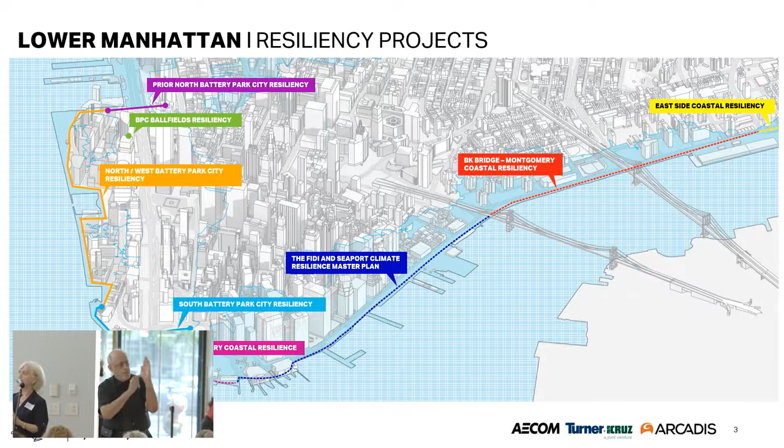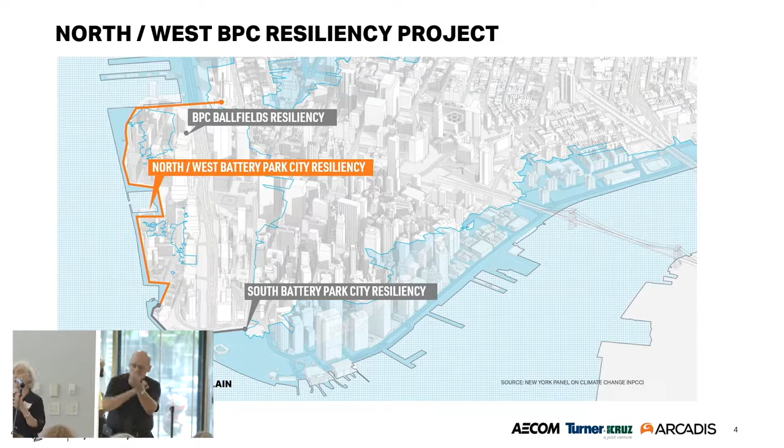If we go to the next slide, we'll get a closer view. The South Battery Park City Resiliency Project extends from the Museum of Jewish Heritage, First Place, through Wagner Park, Pier Plaza, and the northern edge of the Battery. Then in the little dot at the top, you'll see the Battery Park City Ball Fields Resiliency Project. That was a very specific asset-driven project, because that was where Battery Park City suffered significant damage during Superstorm Sandy, lost the ball fields, and saw significant damage to the community center adjacent to them. That project, we're happy to say, was completed almost a year ago now.

The project we're talking about tonight is the Northwest Battery Park City Resiliency Project, which begins in Tribeca. If you look at the left side of the screen here—I'm pointing at it, you are watching this one, but that's okay—it starts in Tribeca and then extends along the waterside edge of Battery Park City southward until it connects with the South Battery Park City Resiliency Project at First Place.

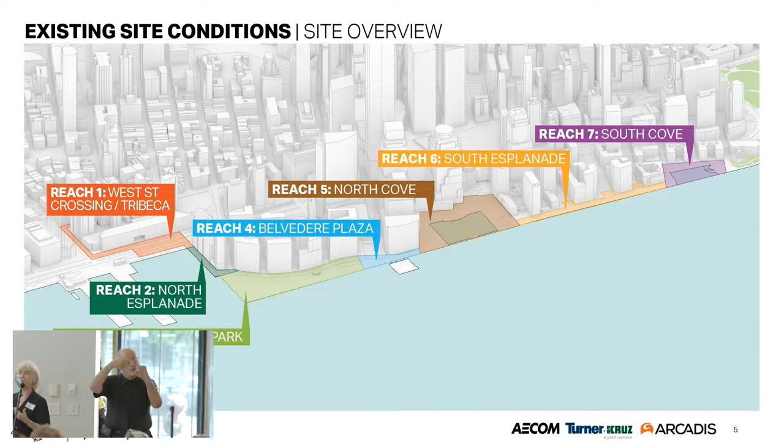Now you may wonder why we are going outside of Battery Park City boundaries into Tribeca. That will be explained in a little more detail as we go forward. But we have to connect high points to high points in order to make sure that we don't have a situation where the water simply goes around our flood barrier system and comes in the back door, so to speak.

I want to point out, for those of you involved with this project in its inception, that this project was at one time two separate projects: a North Battery Park City project and a West Battery Park City project. We had begun design work for the North Battery Park City Resiliency Project with AECOM as our design engineer, and had started to commence the project for the West. But in the spring of 2020, we received design build authority from the state legislature, which gave us a different way to pursue these projects. As a result, the decision was made to combine these two projects into a single Northwest BPC resiliency project. The work done for the North project has been carried forward and is being reflected in the current Northwest resiliency project.

Our project vision is centered on safety, resiliency and environmental stewardship, engagement and collaboration, which we've already talked a lot about, and design excellence. This is a very beautiful neighborhood and we want it to remain a beautiful neighborhood, so design excellence is a huge part of what we're doing.

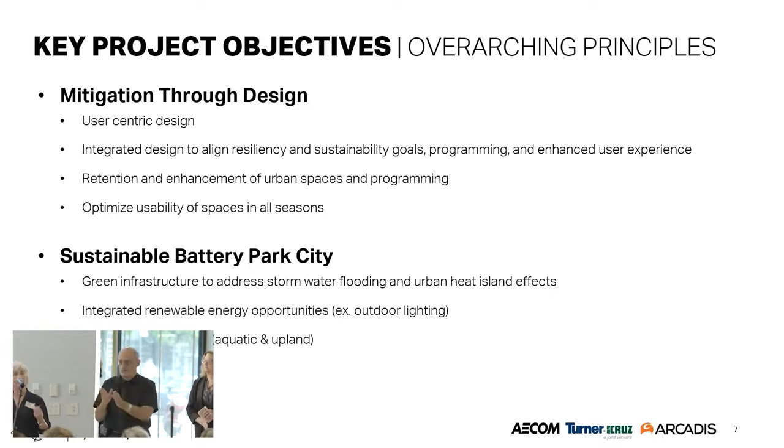We want to make sure that we are incorporating sustainability into our plans. We have a sustainability plan that was launched last year that we're very proud of and take very seriously. We want to make sure that our resiliency projects reflect the principles and tenets of that sustainability plan.

With that, and right before I turn it over to Garrett Avery from AECOM, I just want to take a moment to recognize the folks on my staff who you will get to know much better over the course of this project: Claudia Filomena, our Director of Capital Projects, and Varun Kohli, our Assistant Vice President of Planning and Design, along with others who are not here this evening.

Okay, all right. Claudia and Varun, come on up so people can recognize you and you can wave your hands. Okay, so get to know these folks, you will see a lot of them. Okay, all right, and I am very excited this evening

to be introducing our progressive design build contracting team. The design build approach that we have adopted, which Garrett will explain to you a little bit more, involved the retention of a consulting engineer. We retained AECOM as our consulting engineer, acting as an owner's rep for the authority throughout the project, and they have aided us in procuring a top-notch, world-class team to design and construct this project. We are very, very happy to have Turner Construction, E.E. Cruz, along with their design team, including Arcadis Engineering, Scape, Big, and a few others that Garrett will talk to you about. I'm so very happy and gratified that we're able to provide such a terrific set of experts for this really super important project. Thank you again.

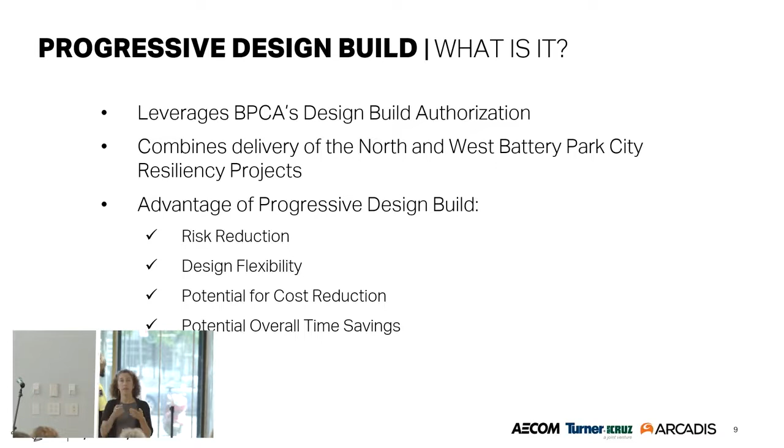It also allows for design flexibility and inline cost efficiency, understanding construction in design rather than designing and then reaching a point where you must redesign or work through challenging aspects at time of construction. It eliminates that concern, and there's hope for overall time savings because of that combination and collaborative environment.

The team is set up essentially as a partnership, through AECOM's role as consulting engineer with the Turner E.E. Cruz team, along with Arcadis, BIG, and Scape. All of you, as well as our project stakeholders, including Community Board 1, Battery Park City's Internal Resiliency Working Group, other building owners, managers, residents, and a fairly extensive list of city, state, and federal agency partners connected to the project.

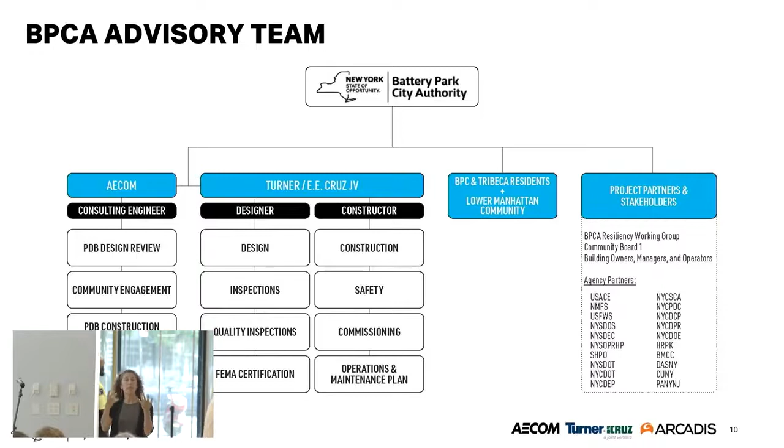BJ mentioned earlier that tonight is the fourth community meeting, but it's actually the seventh time since we got started a year ago that we've been together.

In the very beginning, it was really about collecting information and understanding the technical criteria that were important. We conducted workshops, talking through each particular area, walking with members of the community, trying to gauge a level of concern for a particular item, experience, aesthetic, and then setting the parameters for this team to respond to, which I think they've done quite well.

From there, we put together the procurement process, and through a short list of three folks, asked each to prepare concepts and submit a conceptual design with their best idea and a cost associated. Through that process, which we shared with you in June at our open house, we arrived at this fantastic team.

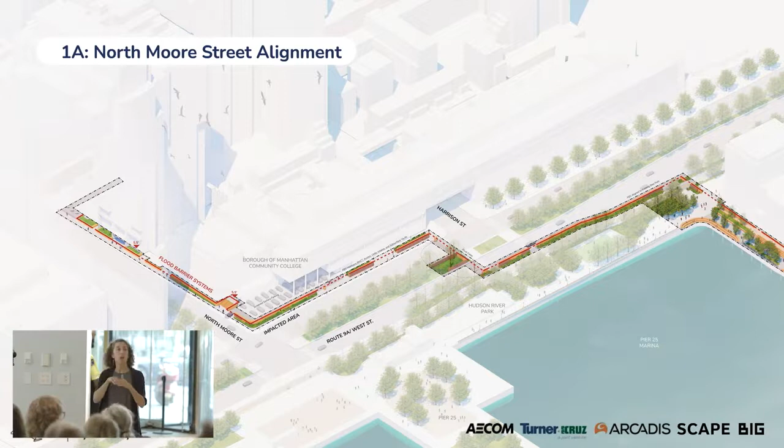So these are significant structures, and they're engineered basically to respond to the flood levels that have been modeled for this area. They also include a fair amount of what we call deployables, so gates, whether they're roller gates or swing gates, to make sure that access is maintained as you're approaching the waterfront. And a lot of the community comments that we heard about this area have very much to do with that waterfront access and the safety of biking.

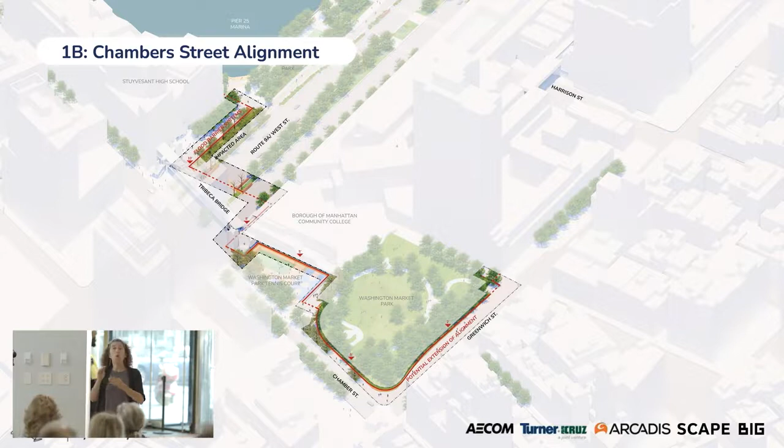For those reasons, we've also looked at another alternative here, which is 1B, the Chambers Street alignment. We've kind of rotated around here, so now we're looking north. What we're looking at here is basically a flood protection system that would move southward from the northern esplanade, running along Route 9A in the median between the bike path and the plaza in front of Stuyvesant High School, crossing over Route 9A with a set of swing gates, and then we're really trying to minimize its presence, integrating with the handball walls in Washington Market, tennis court area. Potentially, this is something that's subject to further modeling - we can either stop the flood protection there to meet our design elevation, or we may need to look at an element that's roughly between 1 and 3 feet along the edge of Washington Market Park.

So that's our first reach. Between them, looking at the advantages and disadvantages, and we can kind of speak about this further at the boards in the back - what we're looking at here in 1A is something that offers a greater area of protection and potentially fewer agency regulatory reviews, but that we believe may come with more urban design impacts in terms of views and access, more deployable elements, and higher operations and maintenance costs as a result.

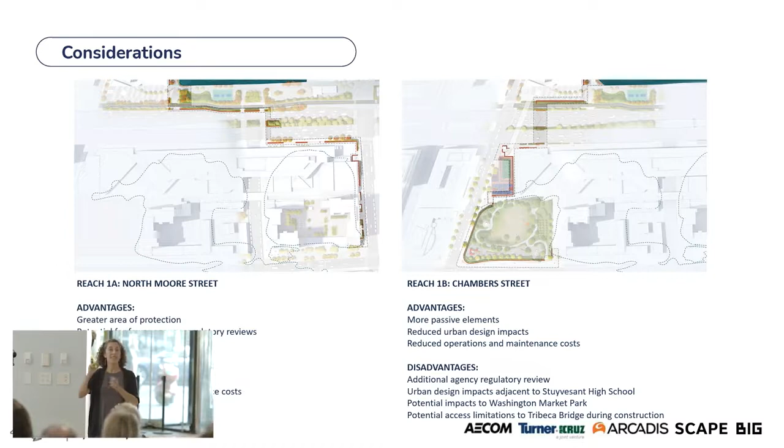In Reach 1B, there are more passive elements, meaning elements that don't need to be operated before a storm comes in, and reduced urban design impacts. However, the amount of area that we're protecting is of course lessened. And there are some additional impacts on Stuyvesant High School, Washington Market Park, and potential limitations to the Tribeca Bridge during its construction.

Reach 2, the Northern Esplanade. This area is maybe a little bit more straightforward, really defined by its acting as a gateway as you're approaching from the north towards the Battery Park City waterfront.

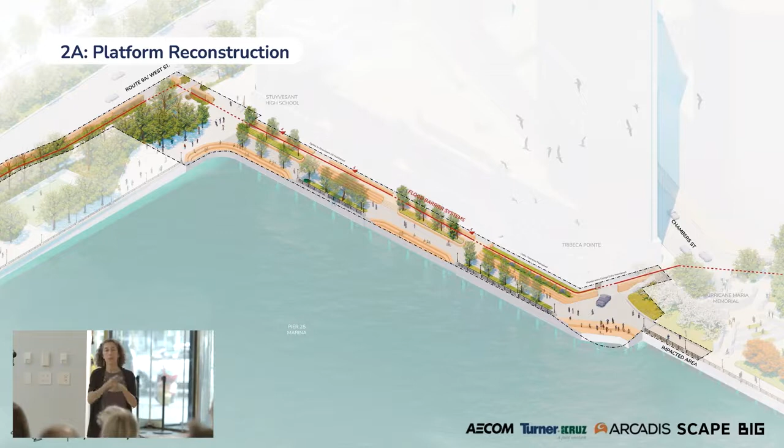Here, to accomplish the flood protection, we need to integrate up against the Stuyvesant High School building, so the entire platform here essentially needs to be reconstructed. In this alternative 2A, we're keeping basically the same cross-section that the platform has today, meaning the east-west movement and the area for trees on either side is maintained in its current dimension.

Because this is such an important corridor for movement, and because engagement with the water has really been expressed as a desire in some of the community engagement feedback, we've also been looking at an option here that would extend further out into the water.

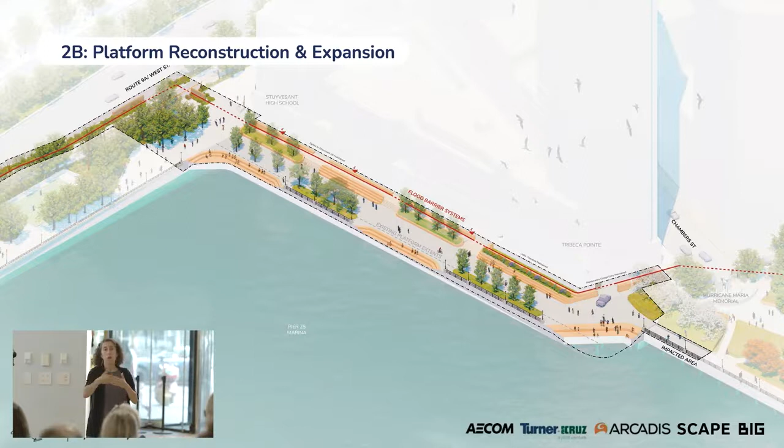It would have some shadowing impacts, which means there'd be additional regulatory review with agencies such as those that govern the water. However, there are some benefits here in terms of the amount of space for movement, for planting, tree canopy, etc. So it's kind of a classic trade-off between urban design result, but also permitting schedule and some other aspects.

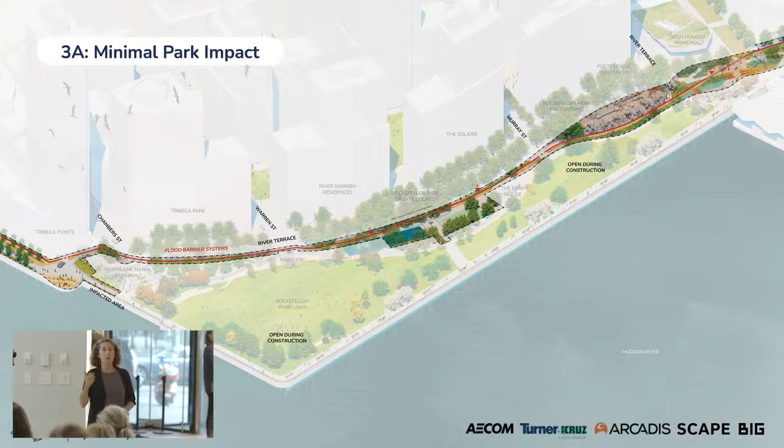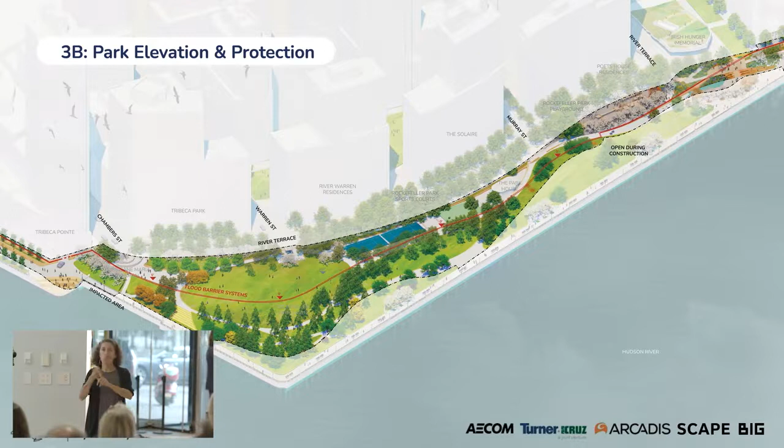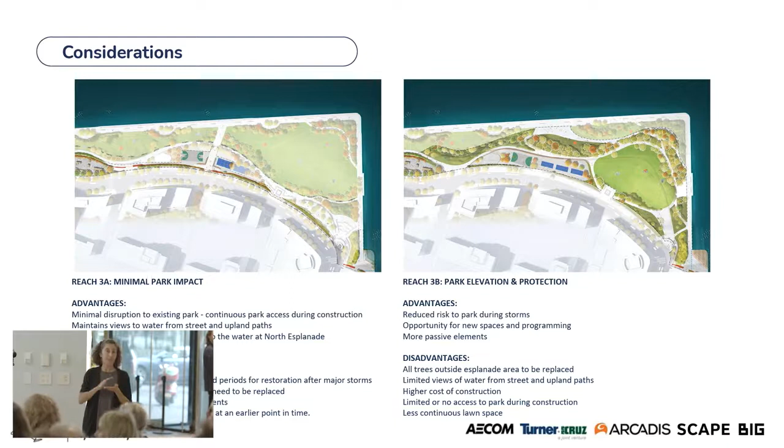This slide sums up the considerations. Reach 3, Alternative A: a more minimal park impact, with also potential opportunities for get-downs. And Reach 3B: reduced risk to the park during storms. I'll just highlight that the disadvantage in 3A is that sometime in the future, the park may be out of service for extended periods.

Okay, let's go to the next slide. So now I'm going to talk a little bit about Reach 4.

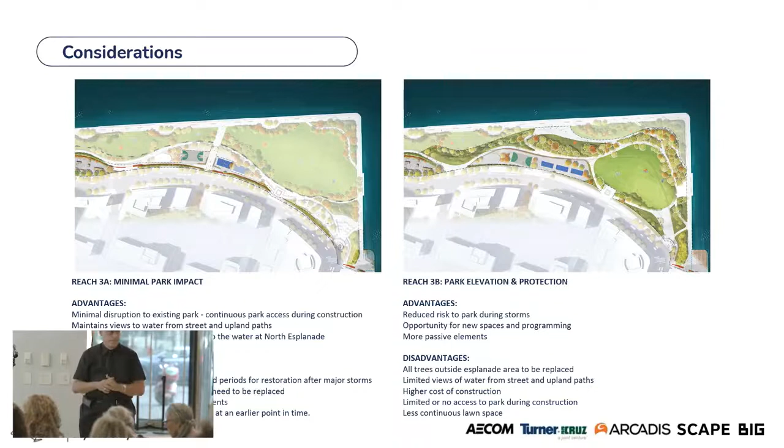The next reach, Reach 4, is called Belvedere Plaza. Basically we have essentially the same flood alignment in both A and B. It is a more passive flood barrier system, and it incorporates the flood alignment into a new elevated plaza and accessible planted berm.

The two options, A and B, only differ relative to the positioning of the ferry terminal. I want to emphasize this is a Port Authority element, so it's very important for you all to make your comments heard in this broader context.

For option A, the idea is to potentially relocate the ferry platform. What this does is enable views of the Statue of Liberty from the Irish Hunger Memorial, which was the design intent of that element.

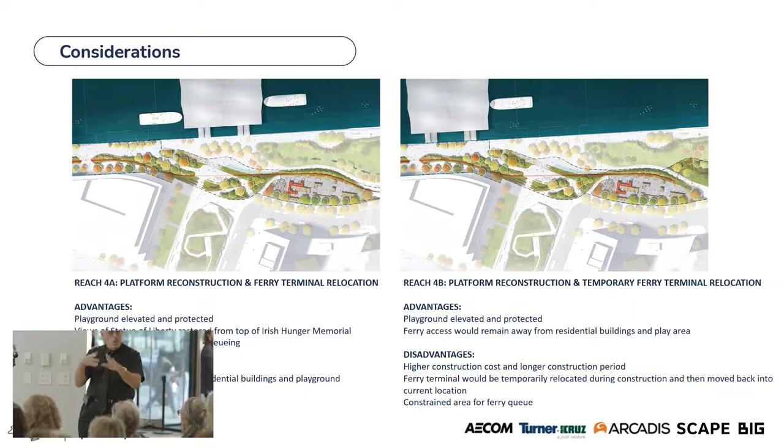It also creates more space for ferry access and queuing near the ferry terminal. The disadvantage is that it moves the ferry terminal closer to the residential buildings and the playground, and we've heard community comments about emissions and noise from the ferry terminals. Reach 4B would potentially move the terminal temporarily during construction but move it back into its current location. It has a more constrained area for a ferry waiting zone, and it would potentially have a higher construction cost and a longer construction period.

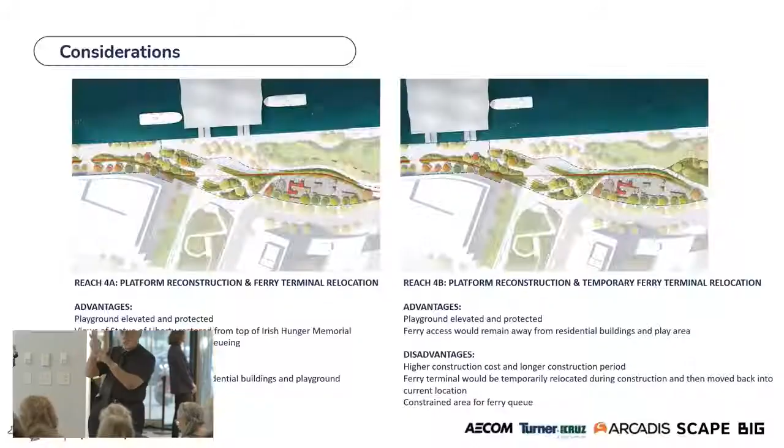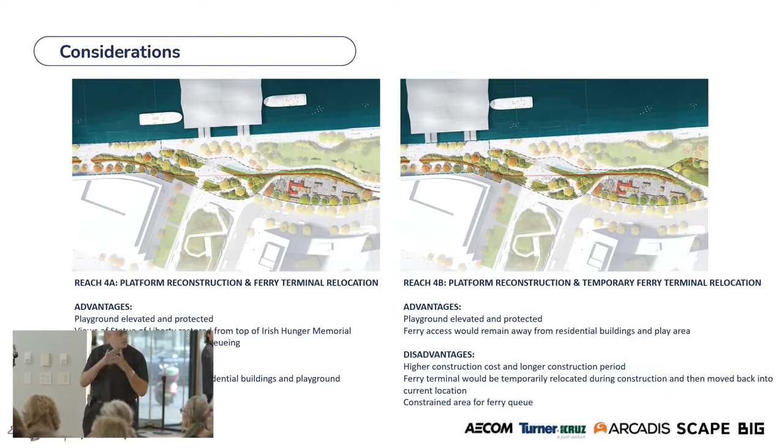I'll just sit on this slide for a minute. In both cases—okay, I don't have a pointer, but maybe Garrett, you could point towards the Irish Hunger Memorial. Let's go back to a plan that has the labels.

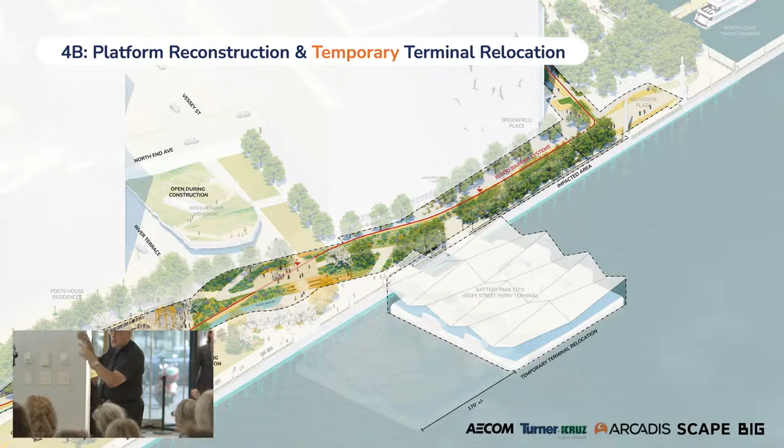So you have the Irish Hunger Memorial in the center of this image, and this is the relocated, temporarily relocated Battery Park City Vesey Street Ferry Terminal, here. It's only about 170 feet, so quite minimal, but the impacts are felt in different ways. You can see the Irish Hunger Memorial, North End Avenue, Vesey Street, and Brookfield Place.

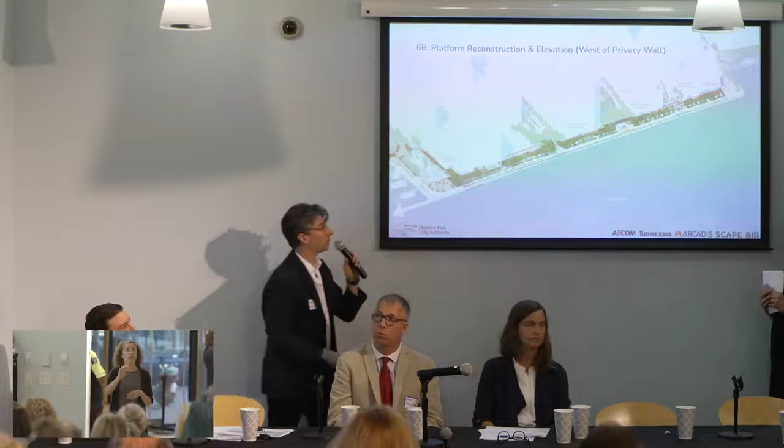As Peter was saying, we do have leanings in some cases, and in this case we're going to be strongly looking at alternative 6A. In the case that we do have to reconstruct the entirety of the platform, we're carrying that as an alternative, and we're representing it to you here.

The impacts, of course, would be that the entirety of the platform and everything on it would be reconstructed. It would be elevated to a higher elevation, just to get that added benefit for sea level rise in the future. We do see an added benefit that we could rethink the edge and perhaps get more engagement with the water. But as I said, we're really looking here at trying to accomplish 6A, because we know how important impacts to the existing trees are, and we'd also like to be doing this as sustainably as we can — meaning using what we have as much as possible.

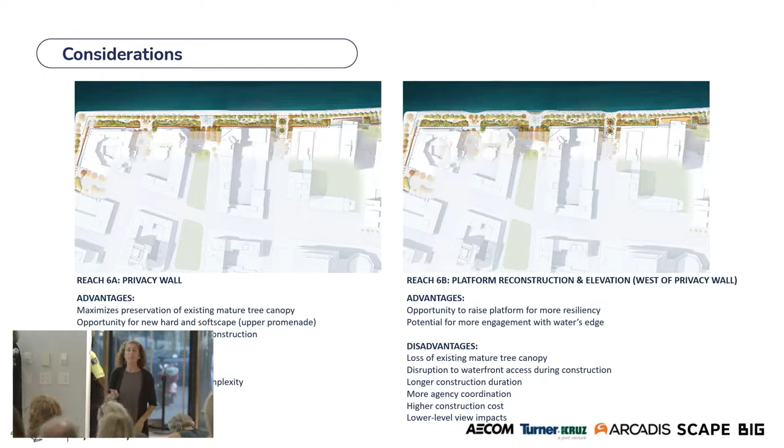It's roughly 8 feet from existing ground level today — that's about how high the flood protection needs to be. So it'll be pretty similar.

That's a really tricky thing about running flood protection through this stretch. You have a platform that's basically over water — if you were to look underneath this thing, you'd see water all the way up to the red line. There's water underneath that entire area, so really the buildings start at the water's edge. The only way to do flood protection is on dry land, and we can't fill into the water. So this area is the area we have to work with.

We're working with a great contractor who will be looking at everything they can do to make it as quick and as painless as possible. I can't speak to the details of that right now, but it's certainly top of mind. Also, things like privacy and screening — we'll want to speak with all the tenants along those ground floors to see what's important to them.

Yeah, so the South Battery Park City project is a separate process. Some of us are not involved in that, some are. I would turn that question to those either now or at the boards. I can't speak to the details of that one.

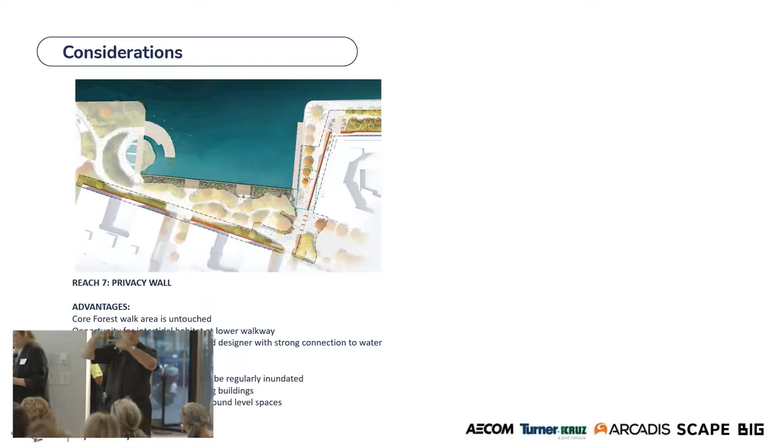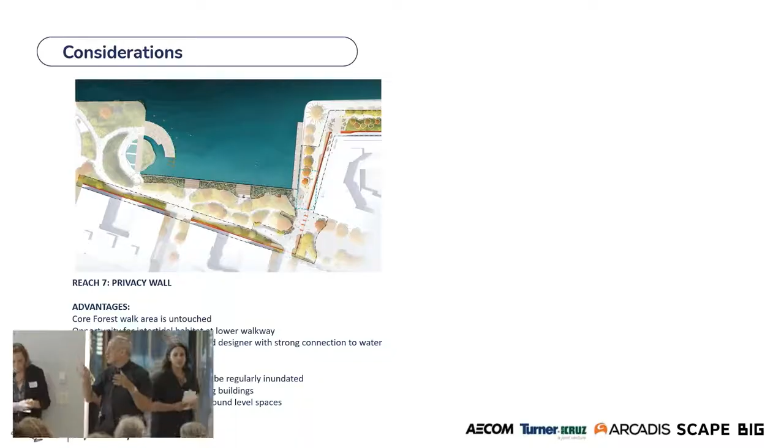In the next slide, we have a summary of the considerations, and we have some sub options because the community comments were so passionate about preserving this landscape. We have sub options relative to the lower walkway, here. The thought is that over time, there may be an opportunity to introduce intertidal plantings, increased public interaction with the water's edge, and to really extend the artist intent of Mary Miss, who we are in very close contact with, into this public realm design in the future.

Again, we're discussing the alignment location here, which is the red line towards the back of the screen, with deployables and the line of protection roughly along the edge of the building. So that's essentially a high level summary of our approach to reach 7.

The disadvantages are that with sea level rise, these lower areas will be regularly inundated, but in some cases, especially if we design some of these lower zones for intertidal habitat, that could also be transformed into a habitat advantage, depending on if you're a fish or a person. If you're a fish, it's very positive. I'll stop there, and pass it back to Peter for some remarks.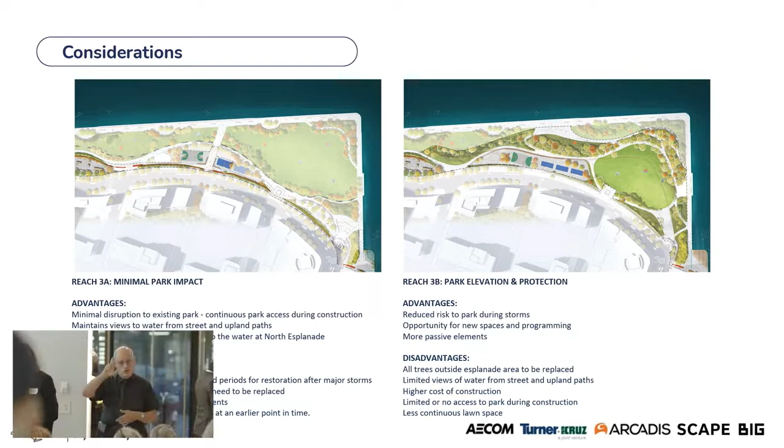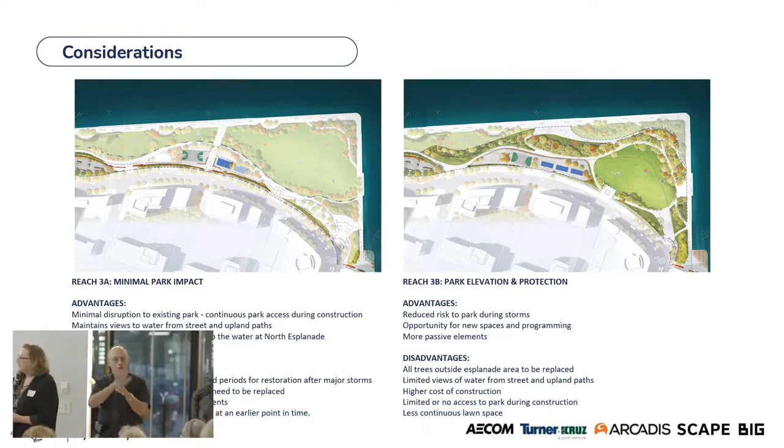Can we go to 4, please? So Belvedere. Here's 4A and 4B. This is the ferry terminal.

Question about the duck pond. We need to know about the duck pond.

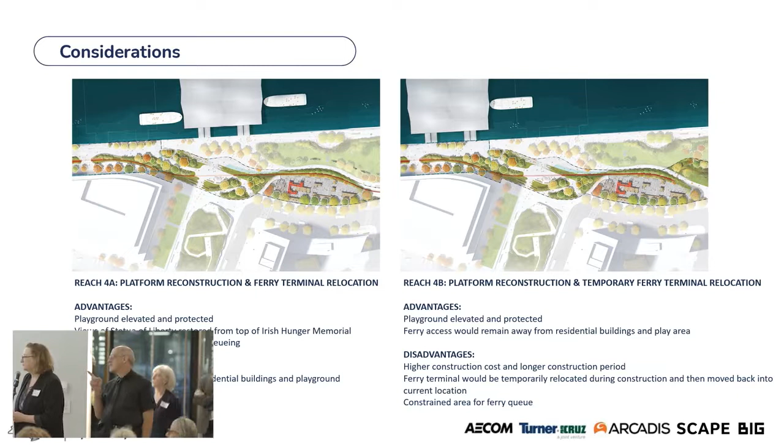In this situation, in order to weave the flood protection, which is the red line, in a way to minimize the impacts to the trees, the lily pond is reconstructed and redesigned, but it could be reinterpreted in a similar vein. So again, this isn't a design proposal, it's more of a location of the alignment.

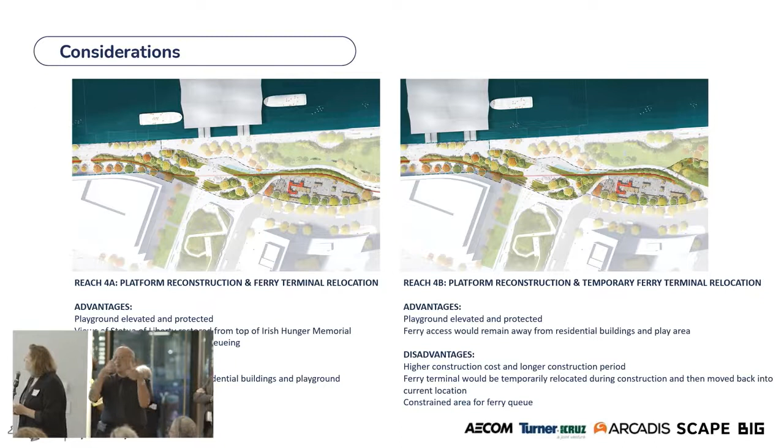If we could simply ask the people who are in the back to try to keep it down just a little bit so that we can have the Q&A. It doesn't work. I mean, it works to do what we're trying to do, but.

All right, I've now been told to jump to the Q&A. So I would like to better understand the reason for why we're moving the ferry terminal north versus south.

Who could answer that question? Garrett, do you want to direct that? Why north versus south? Moving it north not only further impacts the neighborhood via more noise pollution, but brings further exhaust from the ferry closer to where children play.

Understood. So in conversations with the Port Authority about moving the ferry terminal at all, it was our immediate understanding that any move to the south could actually impact the operations of the marina, particularly with the ferries that are north-facing backing toward the ferry terminal. Also, there's the moment where the ferries all push against the terminal, and turbulent water in a move south would be disrupting the mouth of the marina, disrupting the small sailboats, and disrupting a variety of activities happening in the marina now.

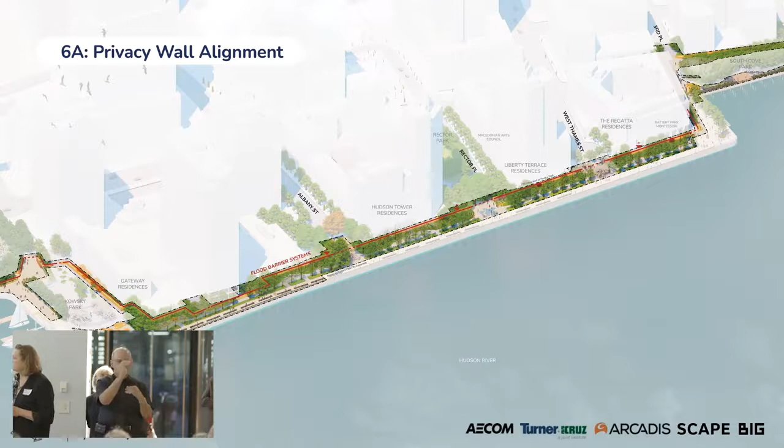The current elevation of the esplanade is at about plus 10 feet above mean sea level. Our design elevation here is at about plus 18 feet above mean sea level, which means there's an 8-foot difference between the level of the platform and the top of the wall, which is about the same height as the privacy wall. In terms of its thickness, generally it tends to be 2.5 feet thick, depending on what its construction is.

There's a lot of other details that would be part of the design process. We're still here in planning and figuring out the alignment. The gates themselves tend to be constructed out of steel. They can be up to 70 feet long or so, and we think that'll be long enough to bridge at the 3 street ends.

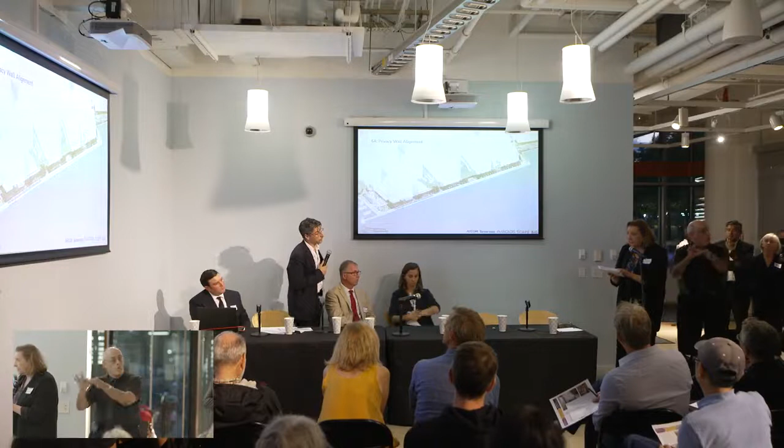So, Jeremy, could you stay with 6, please? And keep going with, when looking at the alignment, were only solid walls considered? And can the 8-foot wall be something that is partially deployable and partially permanent?

That's a great question. So when we think about the protection system that we're designing around the authority, there's a balance that we have to have between things that are deployable and things that are passive. We call them passive when there's no intervention necessary to set them up. If we have a system that has 1,000 interventions required, it might not have a significant urban impact, but it certainly takes away from the reliability of the system.

And when you think about flood protection systems across the world and analyze why they failed, more often than not, they failed because the intervention that was required wasn't made at the time that it was necessary. So what we're trying to do as a team, as we get into the design process, is balance where we can have passive, where we can have deployables, and what we can use for deployables to make the wall less visible and less of an impact to the open space around it.

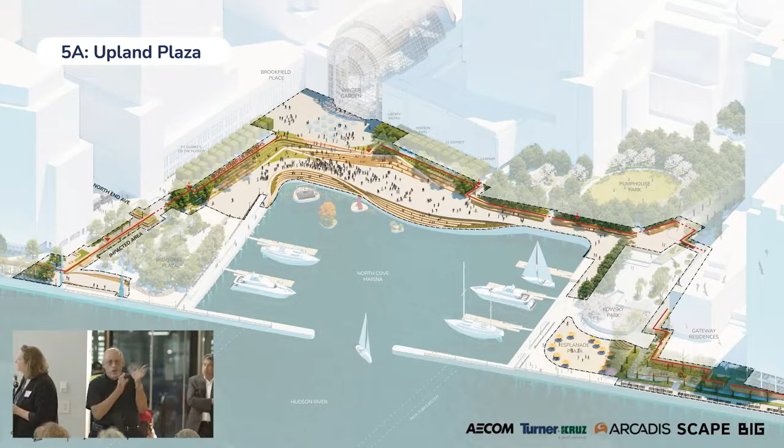In the northern area, coming away from the former Mercantile Exchange building, we're preserving all of Belvedere Plaza and the art piece at the promontory, as well as the two obelisks on the edge. The thing we are changing is a strip about 40 feet wide running through Belvedere Plaza. We've aligned it there to minimize impact to existing entities like art and trees — it's the line that impacts the least amount of trees. So pretty minimal over here.

The whole terracing area, I also learned, you could consider an art piece in itself. It was done in collaboration between the architects and an artist named Scott Burton — all of the stone elements, the circles, the triangles, the terraces. There's no way to run flood protection through here without reconstructing all of that. So that's a design challenge and also an opportunity. We'd want to be in conversation with the intent of that art and of the space as it existed previously, but there's also an opportunity here to evolve it forward and make it ready for the needs of the next 100 years or so.

Staying with 5A, the rendering shows slips currently used by the sailing school as being removed. Can you guarantee this will not happen?

I think a guarantee could only come from the authority or the operators. However, in terms of the design intent, sailing is a great activity — it's actually the kind of thing we'd like to happen as part of this. So we'd make sure that any impacts to the sailboats, the smaller boats, would be minimized. We'd make sure there's space for them, of course.

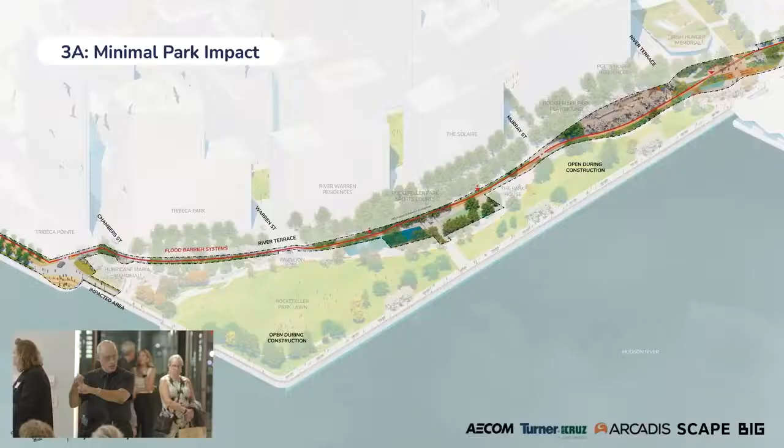So the idea here is everything that is in the more intense color is to be impacted. So the idea with the children's park is that one could remove the equipment, which is fairly new equipment, build up that zone, and then have the entire kids' park free and protected.

I want to make sure we answer some of the folks online who've been asking questions. How long will the work take overall? Will it be done in phases, or all at once? What's the approximate timeline for the project? How can we be thinking about this?

So we're obviously very early in this process. We do expect there will be a phased approach to construction that balances construction being done in other parts of Battery Park City, providing maximum open space and balancing when those spaces are open, closed, and how many, over the course of 1.3 miles long. This is an incredibly large project. So the timing and sequencing of how closures and disruption occur, making certain it doesn't necessarily happen all together in one spot or all at once, is going to be very important. We haven't sorted out exactly how that rolls out just yet.

Can you expand your comment about creating drainage improvements under 3A to address flooding from rainfall? You mentioned that was part of the plans, but we haven't seen that in any of the previous materials.

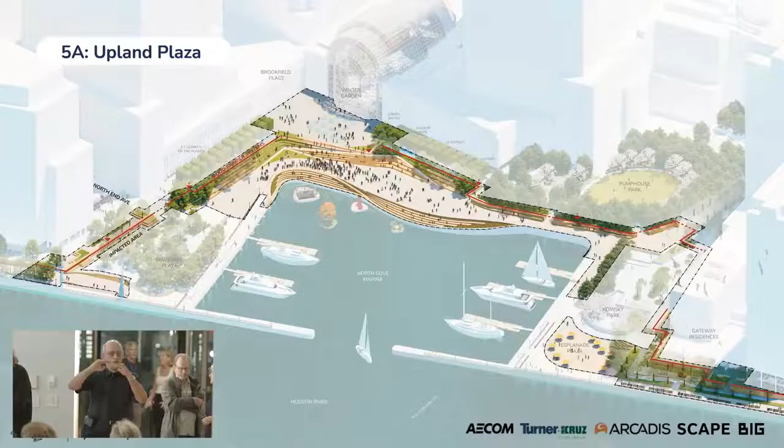There are also really great views out to the west, to New Jersey, so we see this as a nice opportunity potentially along the platform here as it moves west. But then there are two other big ones we're looking at. One is at Reach 5, which could be in conjunction with some of the platform reconstruction happening in the waterfront plaza. The final one would be at Reach 7.

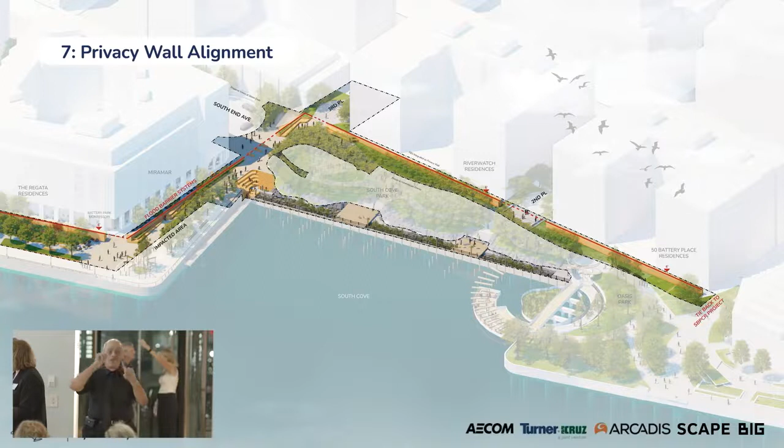So all of this isn't a design, but an initial concept — being able to pull safe access forward and above that, and potentially, as sea levels rise, this kind of lower platform could be transformed into an intertidal habitat. That's also the intent of this piece of art, to bring you up and over, so that would potentially be possible here.

Can you estimate how many trees will be impacted in each of the reaches?

I can say we're trying to be very sensitive to the issue of trees. At this point we don't have an exact count of the trees being impacted, but as we walk through these alternatives, you can see the choices we're trying to make are choices to maintain the trees. Kate talked about this in the reaches she was presenting — in Reach 3, Reach 6, and Reach 7. We're trying very hard to reflect the feedback we've received. A lot of the 500 comments have been about the trees, and the design team is really wrestling with that choice and that balance.

Will all of the flood walls in your plans be permanent, or only deployed and visible during a flood? I spoke about this a little earlier — we're looking for a balance. We don't want everything passive, because that generally creates an exaggerated impact on the urban fabric. We don't want it all deployable either, because that means a lot of intervention to set it up. So what we're doing as we progress the design is finding the balance of reliability. Global flood systems don't fail because the wall broke — they fail because someone didn't intervene when they were scheduled to. We're trying to be mindful of that reliability as we weigh the balance. An intervention means somebody has to go set something up, close a door, lift a gate, etc.